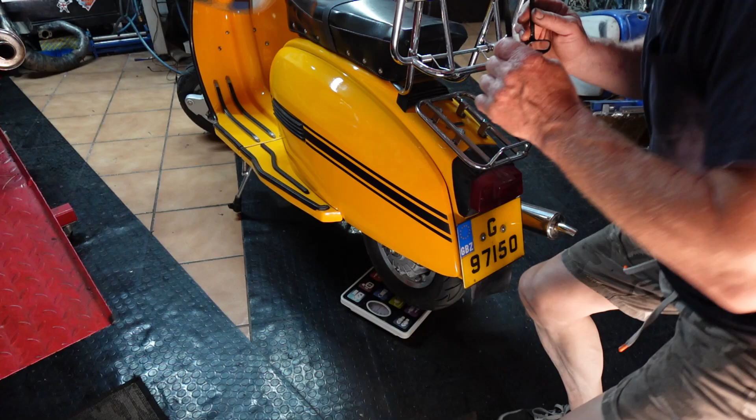So what we're going to do first is we're going to take some measurements and we're going to weigh the bike. Take our first scale measurement and it's on 65 kilograms on the rear. So hopefully it's going to be a bit easier to lift it this time. Right, come on baby. And it's on, let's have a look, let's level it up. 40 kilograms on the front.

So we're looking at ergonomics. This is your position and the way everything fits when you're riding on a scooter. Now, you don't want to be sat at the back with straight arms. This is really bad because straight arms means you're steering with your shoulders. You don't get good feedback. You want to have slightly bent arms, so you're steering with your arms.

It's so much better to get feedback from the bike and from the grip on the front wheel if you've got slightly bent arms. So sit in a good position, a little bit further forward than what you normally would. Try to avoid sitting at the back of the bike. The only time you sit at the back of the bike like that is when you're going for top speed, because you're trying to get aerodynamics and getting in behind the leg shields. But you're going to find that the front end's going to get light and it's going to start trying to wobble. So you can cure this with a steering damper or adding extra weight.

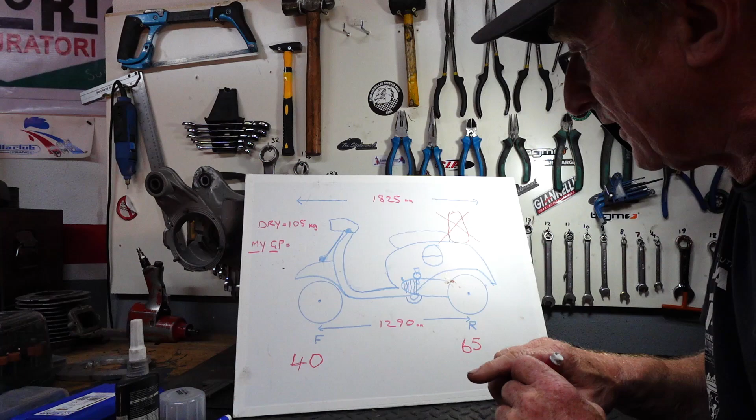Sitting at the front steadies everything up and puts weight over the front end, and having weight over the front end stops that from happening so much. Spare wheels at the back, bad idea. Spare wheel here at the front, good idea. These need to be a bit bigger so you can incorporate a bit thicker and a bit more

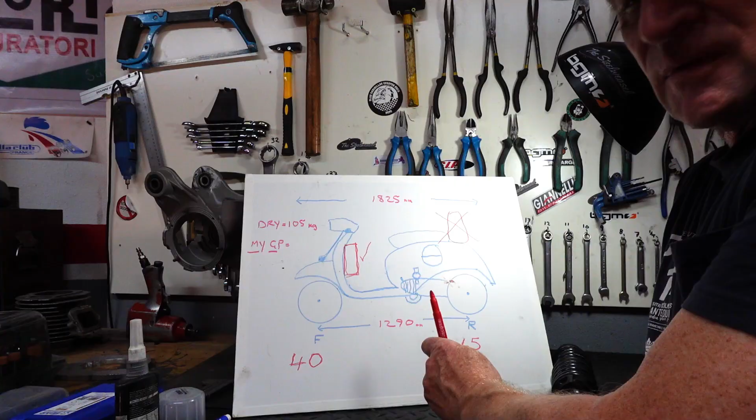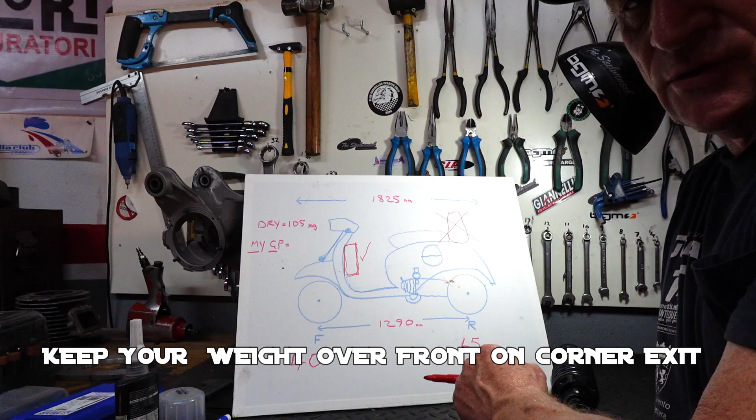substantial rubber into it. We've got a wheelbase on the Lambretta of 1 metre 290 millimetres from the contact point there to the contact point there. That's your wheelbase. Now, shorter wheelbases will turn into corners quicker, and a longer wheelbase will be more stable at higher speed. Now I know it's cooling much better, but summer's not here yet.

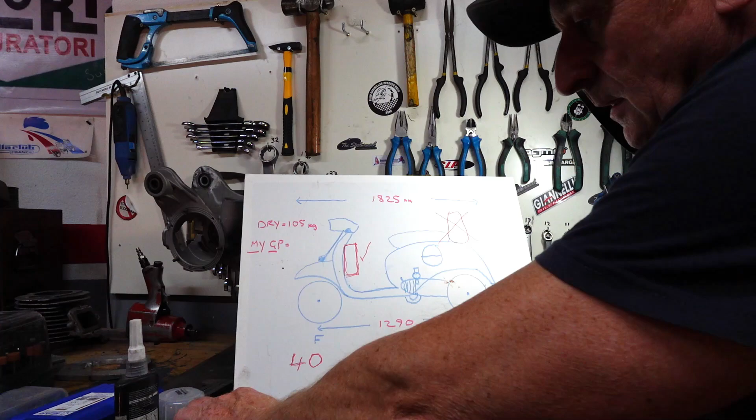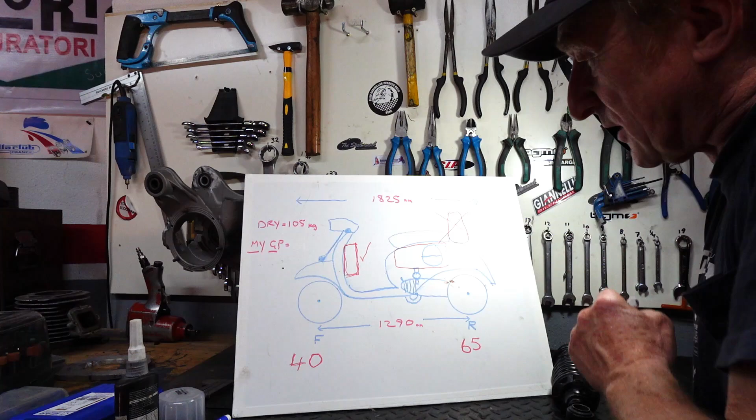So there's one more thing that I dislike that people do all the time on Lambrettas, is putting in a huge petrol tank with lots of liquid inside. Bad for handling.

Right, you're probably wondering why I'm obsessed with the balance of the bike. Well, it's pretty straightforward, because a motorcycle is balanced with the engine in the middle, so the centre of gravity is central. We've got the centre of gravity at the back, which makes the front end really light. Now, if the front end's light, you don't get the correct feedback, you don't get the same traction, you don't get the same stability.

So what you want to do is increase the weight over the front to create better stability on the front wheel. Better traction, better stability. If you've got something light, it's easy to shake about because there's no resistance. That's like the front end of your chassis being light. It can move around and be shaken around easily, so it becomes unstable. If it's like a Lambretta barrel and it's heavy, it resists movement. So it becomes a mass damper.

Right, so this is the suspension setup part of the video. I'm doing this all in one video, so it's going to be quite long. Now, if you're going to do suspension setup seriously, whether you're just a normal rider or you're actually racing, the best thing is to get yourself a book and take notes. Take notes of all the changes that you do, step by step, and then you can see the results and you've got a record. If you go too far, you can go back to what you had before because you've got it written down. So take notes.

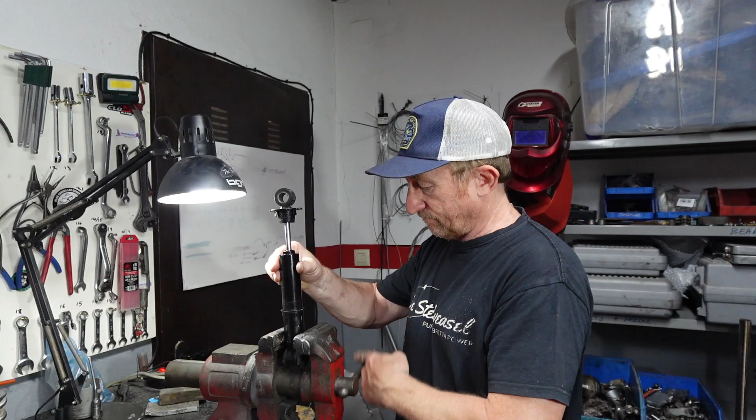But in the last episode, we mentioned rebound, and I was like, does this shocker only have rebound and no compression, as I suspect? The only way to find out is to strip a BGM down and check it all. Then we're 100% sure what we've got. But first of all, I've stripped down this Escort shock that was available. So I've removed the spring, and we've now accessed the shaft.

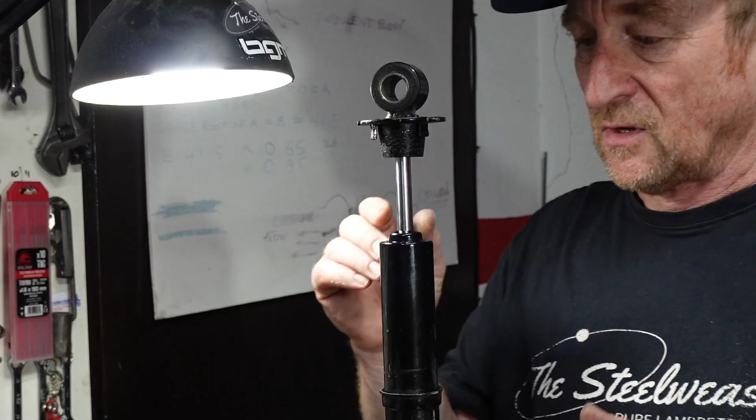Right, so I found with this one, it's an Escort shocker, but it's obviously got the plates inside that flex and gauge the oil that passes, but only in one direction. So that means this damper only works on rebound. It's got nothing on the compression side, because it just goes straight down, just like standard front dampers do. But it's got resistance coming back.

Now this one's a bit knackered because it's leaked a bit, so that first little bit that moves is just where it's got air inside. But once the oil starts passing, there you go, it's got some resistance. So this Escort shock only delivers rebound, fixed rebound gauged by these metering plates inside. So is the BGM the same, or does it have compression and rebound? And does the adjuster do compression and rebound, or does it only do rebound?

Right, so I've rigged up a contraption to get my spring apart. On this side I'm using your basic ratchet strap, which I'm putting around like this, and then I've made a sort of makeshift tool. I should really make a proper spring compressing tool. If I get some materials, I'll be able to do it. But in the meantime, we're going to just go like this with this makeshift jobby.

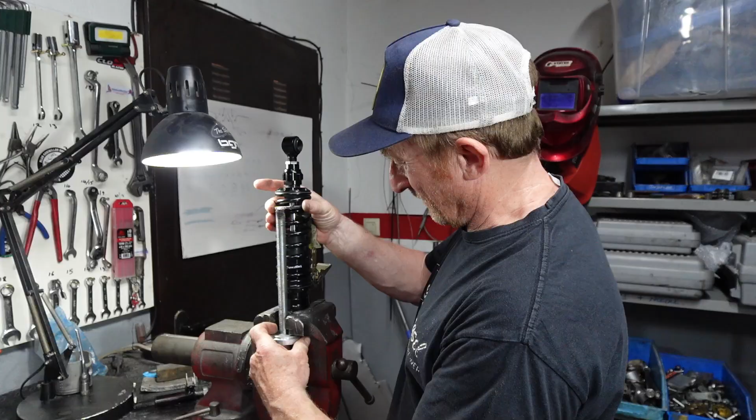So we can, got a little bit of pressure on that side. Now on this side of the spring, I've made this tool to hold it. So that's going to go in here, and then it's going to just wind the spring down. But unfortunately I need to hold it in position. I might even put a bit of tape on here yet, just to protect my spring.

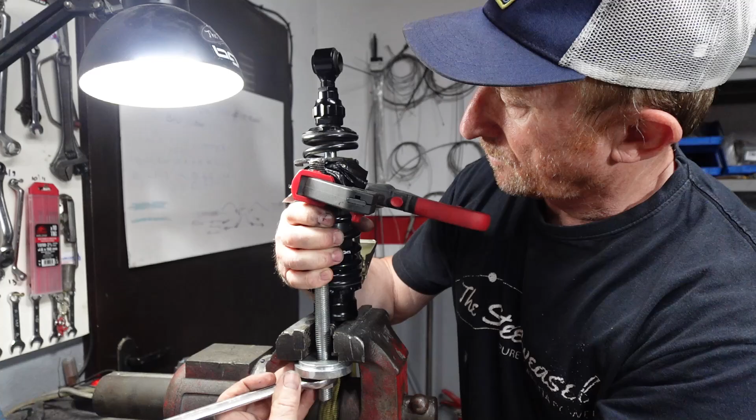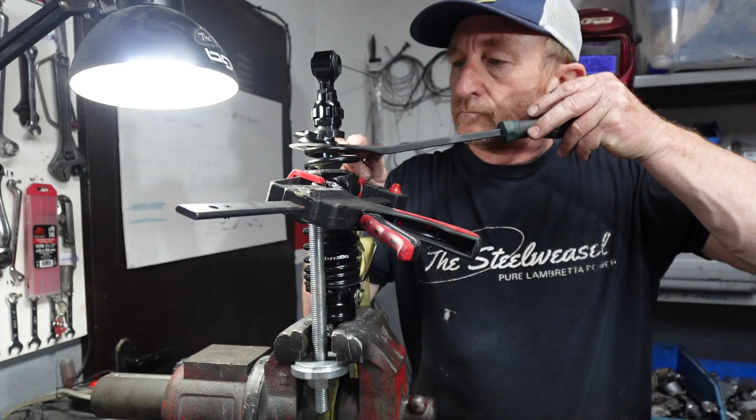Tape. Right, this is how it fits. It goes on with a bit of tape, but it's got a tendency to want to pop out. So this is going to hold it in position while I crank it down on the bottom. And it's out. Gently does it. Lovely jubbly.

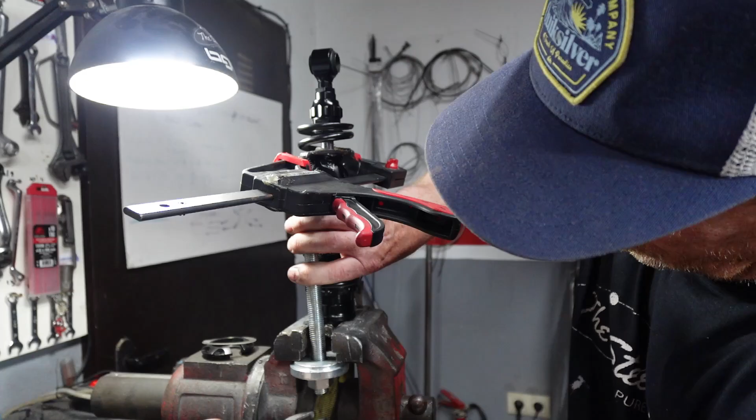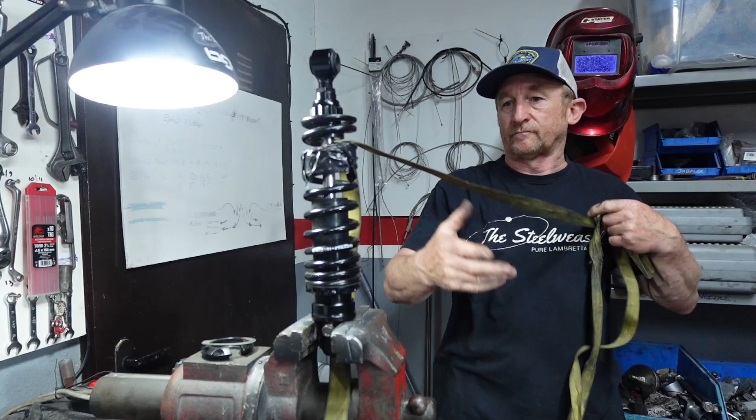The spring can be removed. And we've got our shocker. Good thing is I can clean this now as well. That's a bonus. When it's all apart, you can do a better cleaning job of it. But now we can see how this works. Put some light on the situation, shall we? Dun dun dun. Let's do it fully one way.

That's fully hard. Oh dear. That's rebound. But the compression, that's full on rebound, but compression, it ain't got any. So all it does is control rebound. It's not rebound and compression, which I didn't think it was. That's why I put in my video, it's rebound. It's actually rebound, because there's the rebound on hard.

It's super hard, but no compression control. So the only compression you've got is from your spring itself. So now we've verified that this shocker works exactly the same as this one. We've only got rebound control, but it has got an adjustment here for the amount of rebound. There we go.

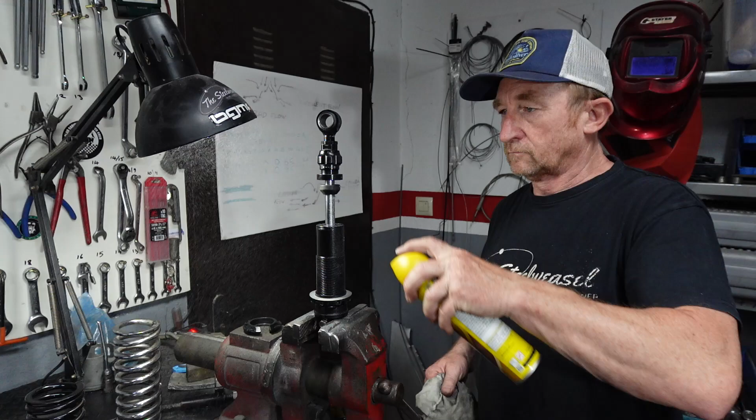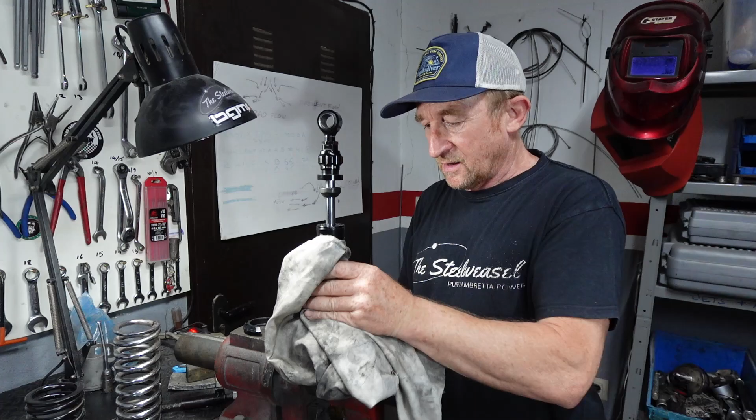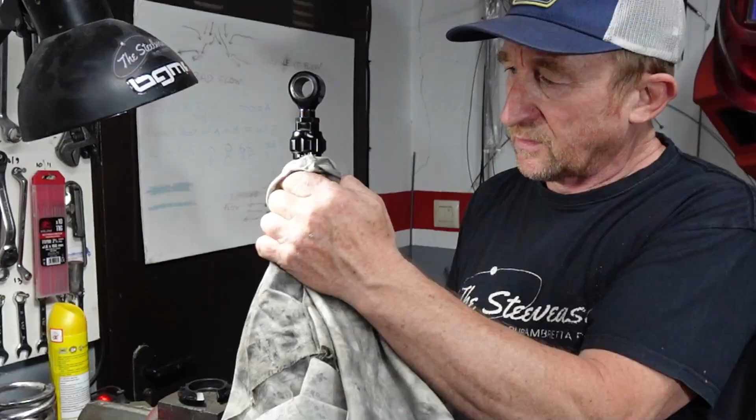Right, I can give my spring and everything, my internals, a bit of TLC. It protects it from a bit of corrosion. I've already sprayed some ACF 50 into the threads, so that'll protect them. I've cleaned all around and I've just used some normal household polish on the rest of it. So the rest of it's just got normal polish on everything, and then a little bit of a wipe off.

So what I'm going to do, I'm going to do my spring with ACF 50, because the inside of the spring is never easy to get to when you're cleaning, when it's all together. So a little bit of protection on the inside of that is going to save it from corrosion and what have you, and yeah, it'll prolong its life. So that's better. That's all nice and clean on the inside now.

Oh yeah. Right, so before we put this back together, I'm going to do the measurements of the spring. Now it's not compressed at all, because before it will be under some preload, so you couldn't measure it properly. Now I can measure the spring, I can measure the windings, how thick they are, I can measure the length, I can measure the internal and external diameter. Right, let's have a look at it.

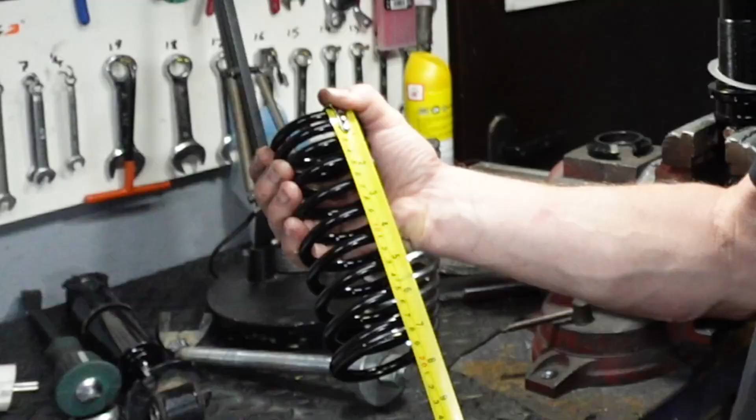So we're looking at 180 mil in length. Outside diameter is 63 mil. Inside diameter is, let's have a look, see. Better with my vernier. Vernier, 46 mil. So let's write all this down before we go anywhere.

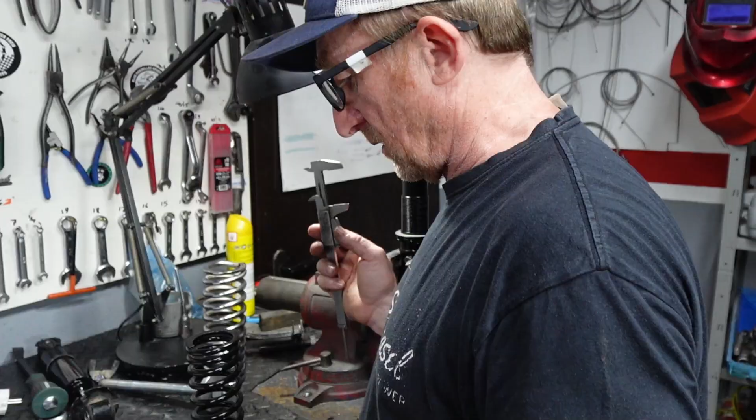ID 46 millimeters. OD is 63 millimeters, and the length was 180. Right, we've now got some information down already into our book. As you can see, we'll get some information as we go along.

We've got the internal diameter, we've got the outside diameter, and we've got the length written down now, and we've got the spring rating also down. So now we need to get all the other stuff in, so we've got a good record of all our settings, so we can carry on with the settings. Okay, before we do anything, we need to be in the same attire, the same clothes as what you are when you normally ride the bike.

So if it's a leather jacket and a crash helmet and gloves and boots and jeans or whatever, that's what you should be wearing when you sit on the bike to check the sag. Okay, if it's full race leathers and helmet and gloves and boots, then that's what you've got to be in. Or in my case, it's t-shirt and a pair of shorts and flip-flops.

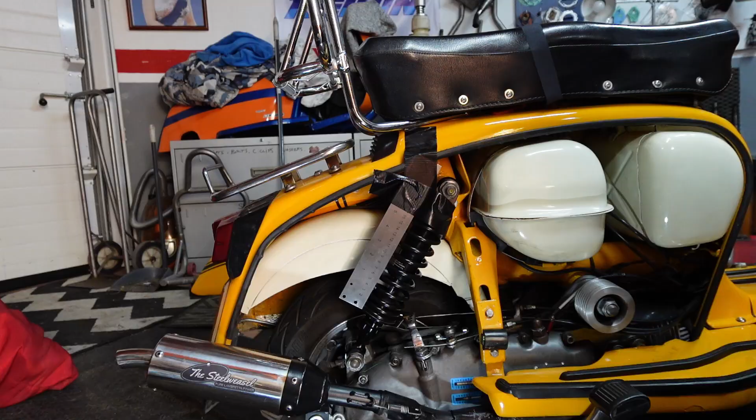Okay, step one is our rear suspension. So we've set up a rule here, so we've got measuring from the very bottom edge of the spring here, with it now just normal, sat on the stand, and shocker at full extent. So now the first thing we have to do is take it off the stand and let the bike sit on its own weight.

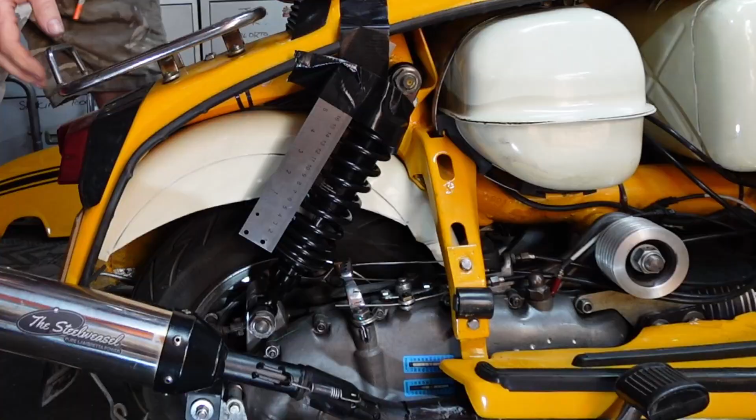So what you need to do is just give it a little lift and drop. So when it drops, you've got your measurement for your sag there. You'll be able to lift it up and you'll be able to see how much it actually moves to full extent to unladen sag. So we want about 6 mil, and at the moment we're on 8 millimeters. So we've got no preload on at the moment.

So now we need to adjust the preload because we've got too much sag unladen. So we'll wind it down. It's easy to wind, you can wind it by hand, you don't need to use the tool until it gets further down. So we're going to put on 10 mil of preload. First setup, 10 mil of preload, a bit more.

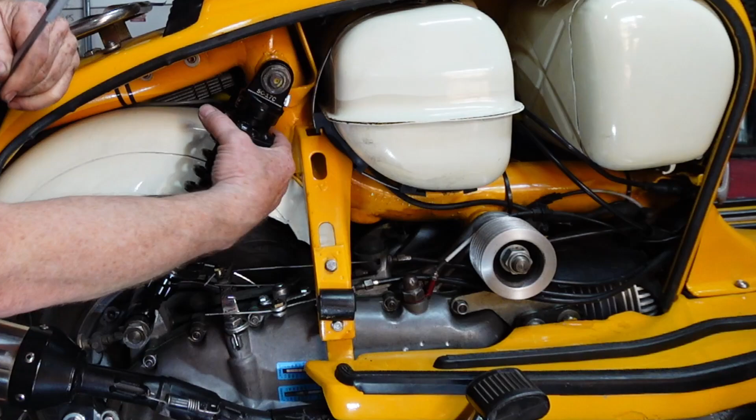Till we get, okay, we're there. Almost. Bang on. Right, we've got 10 mil of preload now on the spring. Right, yeah, that's good. So take it off and see what we've got. So with 10 mil, now I've got 4 mil of unladen sag.

So it's got 4 mil, which is not much, but it's just that little bit. So we've gone a bit too far. And we want to have 6 mil of sag without a rider on it. And we're now on 5 mil. We're getting there. 1 millimeter more, so we're going to go to 7 mil on the preload and go 7 mil.

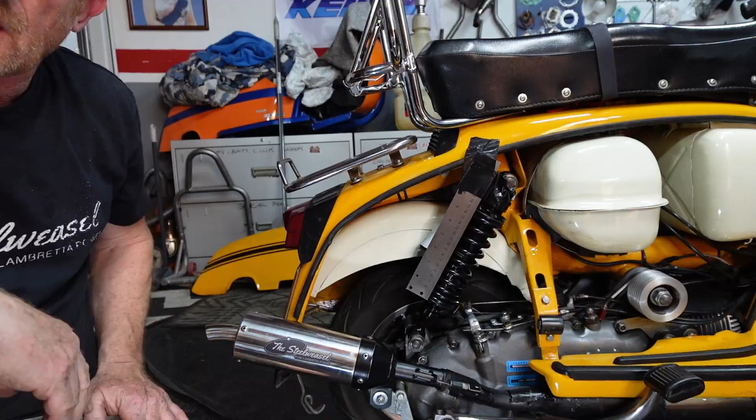Okay, back on again. Okay, right, back off. And there we have it, 6 mil of sag. 6 mil of sag. So that's without a rider on, we've got 6 mil unladen sag. Right, so when we go back on again now, it's going to be a loaded sag.

So I'll now take the bike off the stand, sit on the bike with my normal attire, which is t-shirt and shorts, and measure my sag, which should be 3 times the original sag. So we're looking at 18 mil. So I'm sat in the normal position I'm going to be sitting in. And that should be now 18 mil, I hope.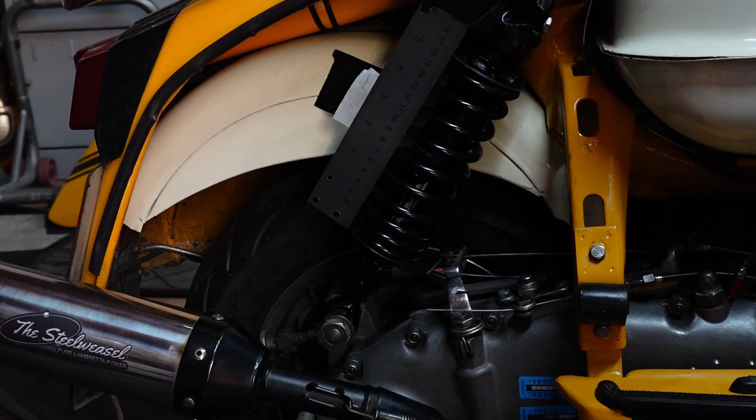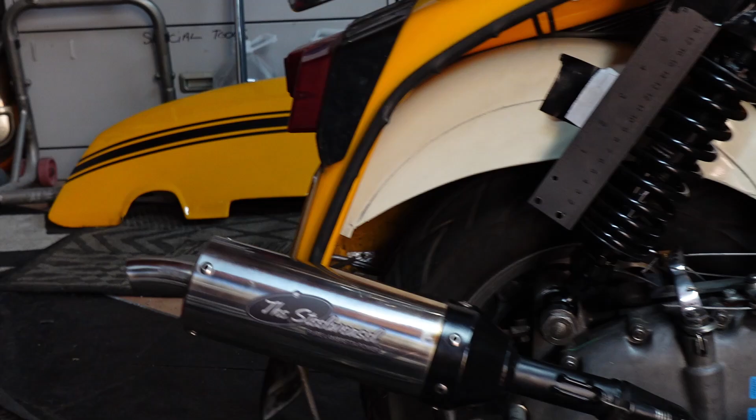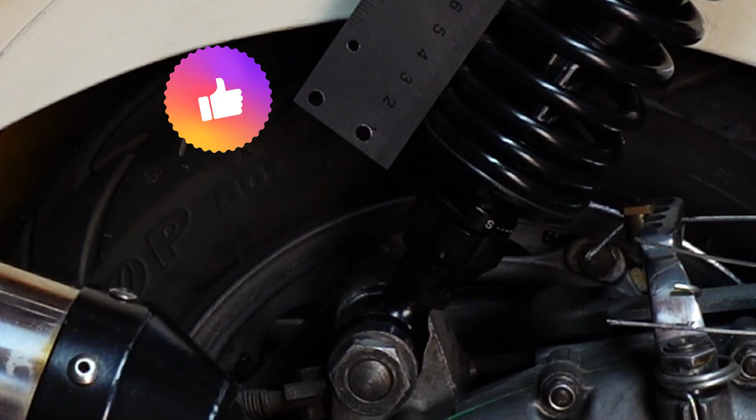We've gone back to the 10 mil preload again with the 4 millimeters of unladen sag. So we're going to now check what our laden sag is with me on top, and I'm hoping to get closer to around 18, between 15 and 18 mil is probably where we want to be. So it was a bit too soft. Now we should be more or less in the ballpark, I would say. Hopefully that's about right.

Right, as you can see, just setting up the sag on the rear shock of a Lambretta is not so straightforward as some people think. It can take a little bit of time to get where you want to be. So you've got to have some unladen sag. So if you go over some bumps and your arse leaves the saddle, the bike tops out where it shouldn't. The bike should still rise a little bit and keep in contact with the ground.

Okay, I've tried to keep it as simple as possible and not go crazy on stuff, but it is a bit of a kerfuffle to set things up. So what I'm going to do is I'm going to give you sort of ballpark figures of where you want to be for different weights. So what I've got at the moment, see, I've actually put on 5 kilos, so everything's changed for me. So all this is readjusted from 4 years ago because I've put weight on. So now things are slightly different.

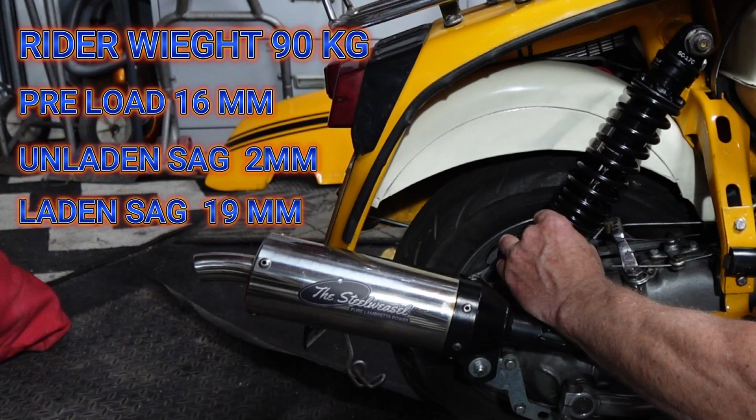1, 2, 3, 4... 20. Right, we're gonna take it off the stand and check, see how it responds.

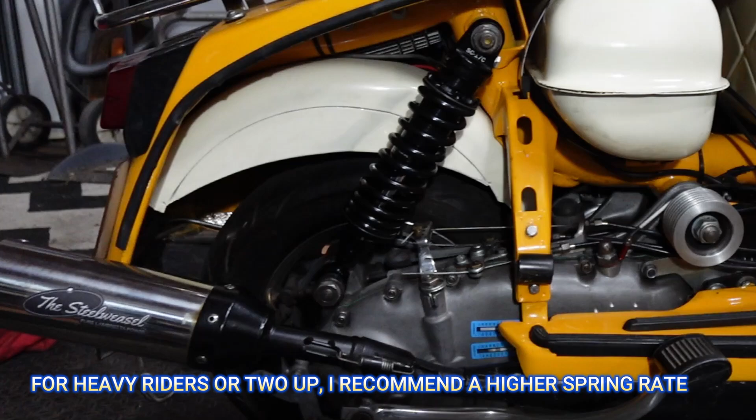Perfect. And I think that's pretty much it. It's pretty good. If you want to get it any better, you need to go out, test drive, and literally go over some bumps and see how it responds, see how it handles. But that is basically where we're at.

20 clicks, it's perfect. I reckon if you're 2 up, you want to maybe go to 25 and 20 on the spring. Right, I had considered on the setup putting all my gear on with the race boots and the leathers and the helmet and gloves and everything, but as it is at the moment in here, 29 degrees Celsius, I decided not to bother.

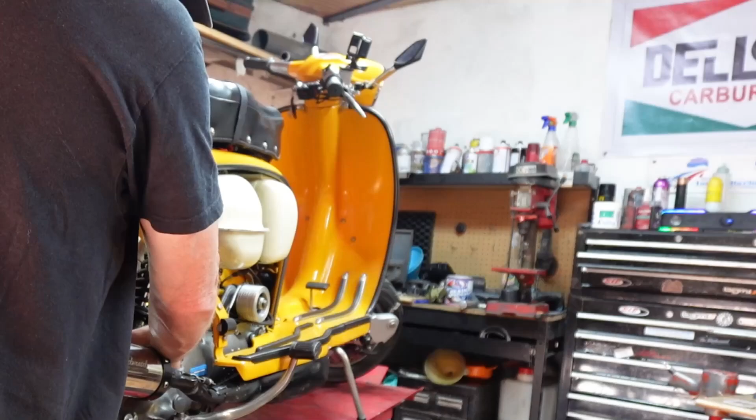Right, well I'll offer it up and you can kind of see how bad things have got. There's not much of the rubber left, top and bottom. I don't think they're going to take much pushing out. I could probably push them practically out with my fingers, maybe. So we'll get these old ones out and then have a look at fitting in these new ones that I've got from BGM.

Right, so what I'm going to use is, I've got a couple of sockets, one smaller one to fit on the bush and push it through, and another one on the back so it allows it to fall in. So we'll just whack it in the vise. See if we can get it to fit. Probably could make a tool for this. Oh, it's just falling out. Look at that. Didn't even need any force to get it out.

So that's what's left. It's just collapsed on one side. So as the shock is impacting like this, it's just destroying the bottom part of the rubber. It's just not man enough, is it? I think maybe you need to redesign this part of your shocker, BGM. These need to be a bit bigger so you can incorporate a bit thicker and a bit more substantial rubber into it. Or look for a different compound. Let's pray this is a bit better.

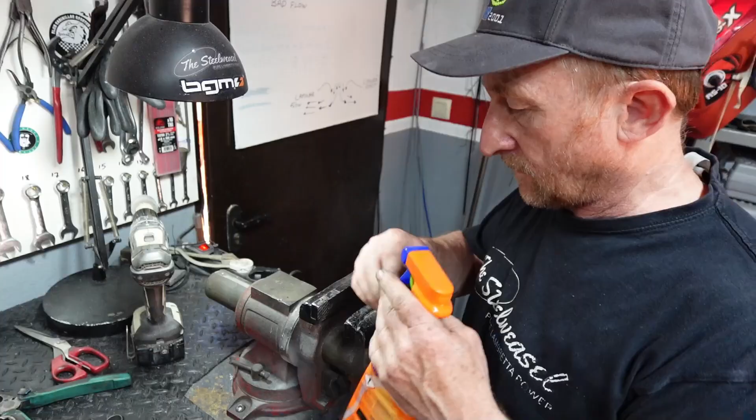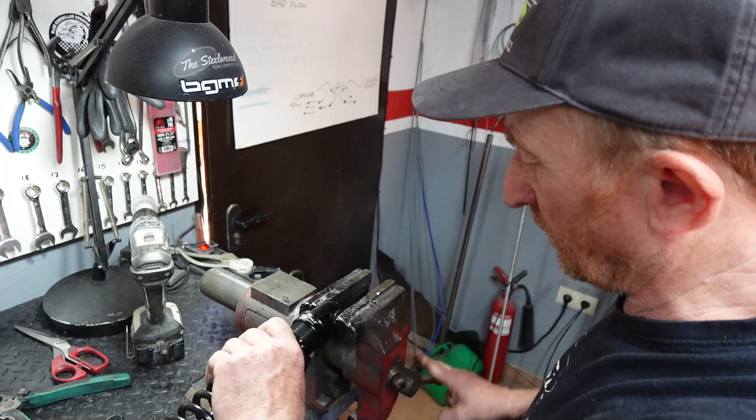So we're going with soapy water, kind of thing you'd use on your grips when you're fitting grips. Bit of soapy water, once it's dried out, then your grips go and grip again. So soapy water, and we're just going to press them in. Oh yeah, that's definitely the way, because it flies in there so easy with the lubricant. Right, we'll put a socket on the back now so we can get it all the way in. A bit more.

Oh, so everything's a little bit too slippy. Dropped again. Will you stop doing that? Right. That's it. Okay, that's in sweet. So that's pressed in nicely. Lips come out on both ends. Let's do the other one.

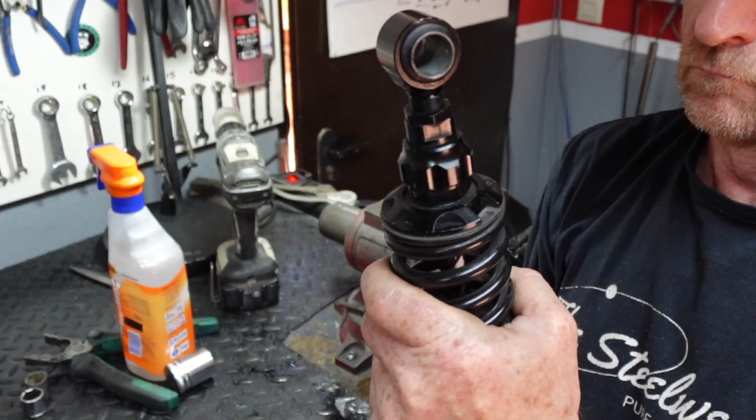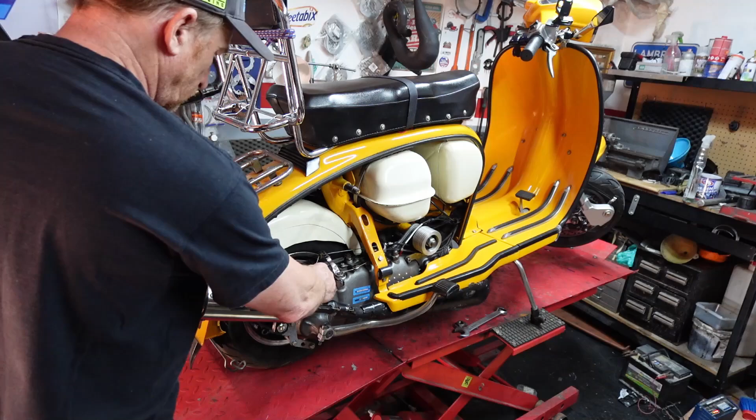That's it. They're in there. Hopefully that'll dry out and it'll be good. Well, they've dried out a bit. We'll put a little bit of grease on that.

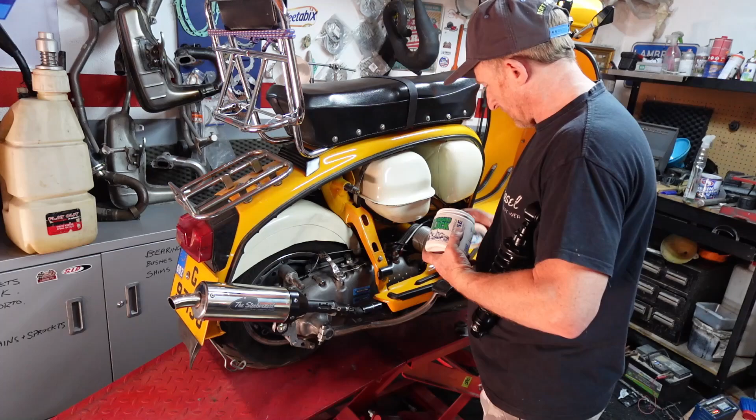I think somebody messaged me once, what grease do I use? And this is what I use. Corrosion Block. It's exceptionally good at stopping corrosion, and it also is a really good bearing lubricant. It's got a lot of additives in, aircraft quality, really good. A little dab of that on there.

In fact, before I refit this, I'm just going to jack it up a little bit more, because I think I can get a bit more on it. Or can I? No, I can't. Can't, it's max. That's as far as it's going to go.

Well, I've got Jet 200 casings in this, because there's more meat around the transfer ports on the Jet casings, but I've got a wider lug on the back here, so I have to put a bit of shimming on it and a spacer. Oh, hang on. Washer.

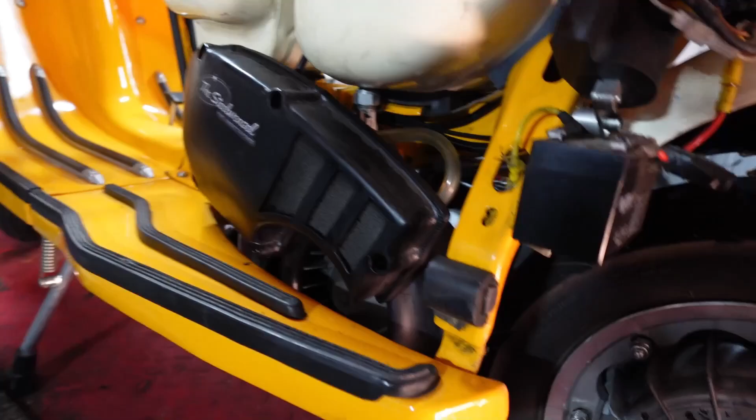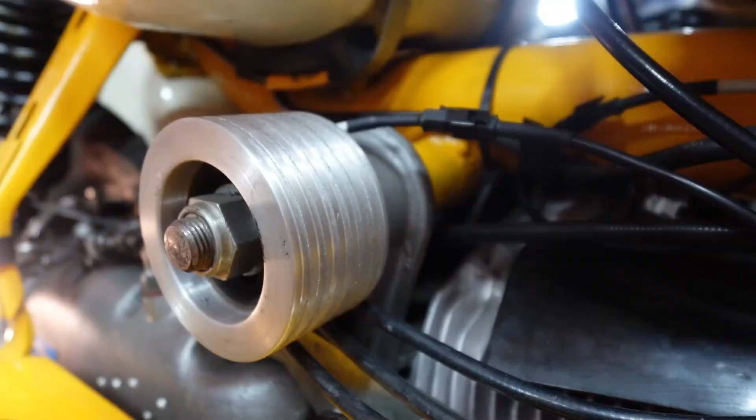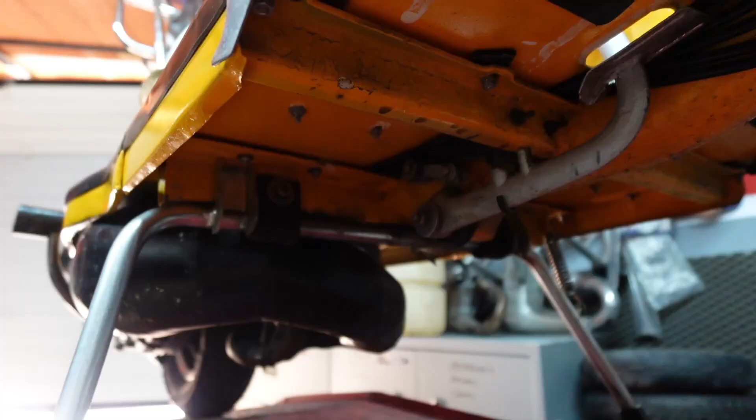So when it comes to cooling, have a look around my engine. I'm running an MMW fan on my Vape ignition with a center cone in it. These are my cowlings with a venturi on them to help flow extra air into them. I've got this heat sink on the engine mount. I've yet to make one for the other side, basically because I'm very lazy. Fiberglass head cowling with a bigger cutaway on this side to help air exiting. In the future, I'm planning on another frame, not this one because this is a nice Innocenti one, to incorporate an air ram into the chassis that blows air over the engine.